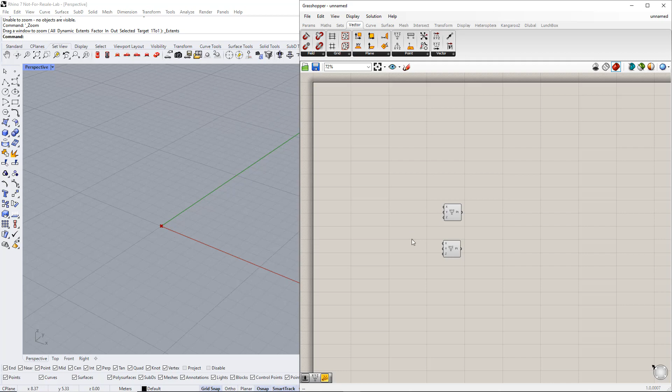For the second point, we set up a number slider to the x-coordinate, so that it can be easily adjusted later with the slider. We insert the number slider command from the Params tab and then double-click on it to change the lower and upper limits of this slider. We enter number 1 for the lower limit, and 30 for the upper limit.

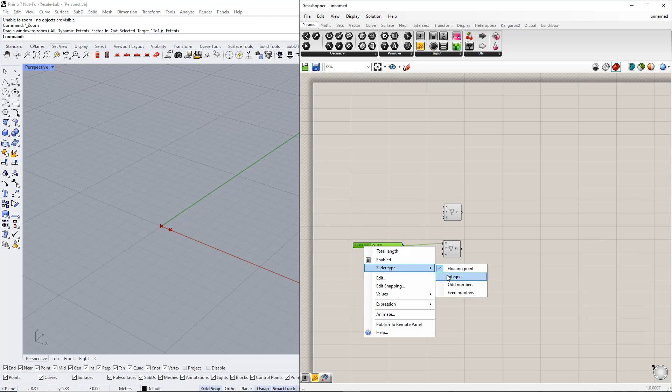We also enter a name for this slider, and for that we write total length. By right-clicking the slider, we can select the slider type, floating point, integers, etc. For example, we select integers.

After that, we create a line between these points using the line component. As you can see, when we click this line, it is colored green. Next, we determine the middle point of this line using the curve middle component, which is in the Curve tab.

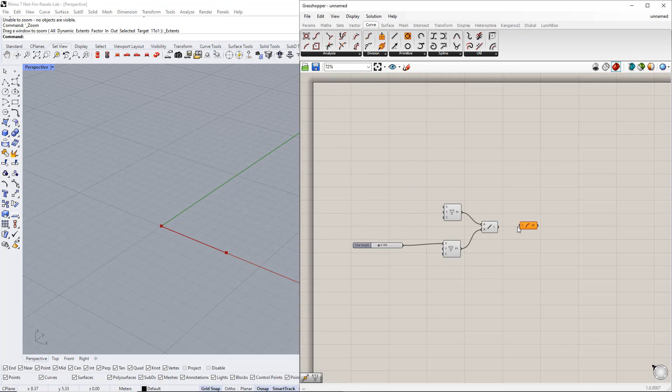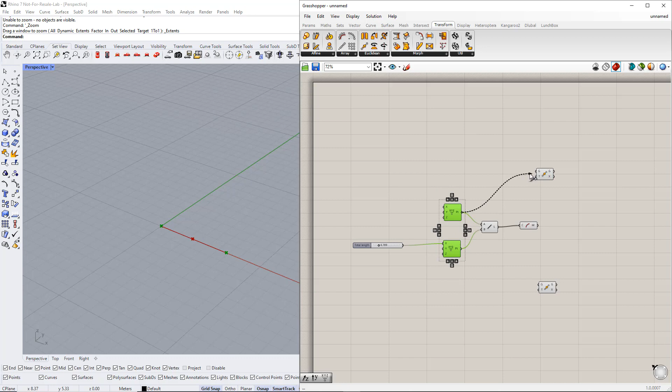In the next step, we copy these points using the Move component. You can find it in the Transform tab or double-click the canvas and write Move. Now we start to copy these points in the Z direction. First, we copy the base points. As you can see, by default this value is 10 and in the Z direction.

We need to insert the unit vector parallel to the Z-axis by using the Vector tab or by double-clicking the canvas, writing Z, and selecting this component.

We set up a range, for example, from 1 to 5. For this, we need to create a number slider. We can do this by double-clicking the canvas and writing 1, point, and 5. After that, we enter side height for this slider name.

For the third point, the middle point, we repeat the same procedure, but regarding the value in the Z direction, we insert the expression component. Double-click the expression component to open the expression editor and change the expression to x plus y, where x is the side height and y is the apex height.

For this, we set up a range between 0 and 5. After that, we enter apex height for the slider name. Then we create lines between these points using the line component.

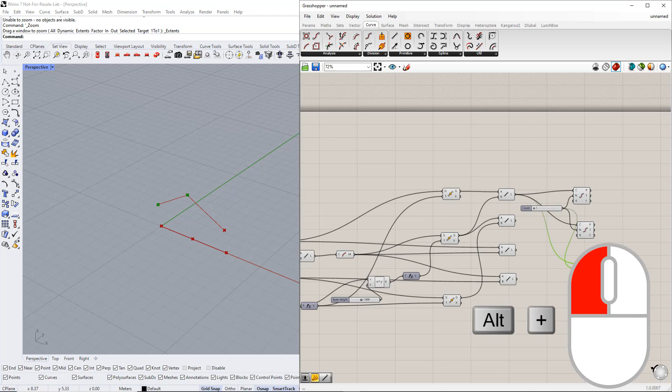Now we create the verticals as well as the diagonals. We begin with the verticals. First, we need to determine which points will be connected to each other. We connect the points of the first line from the lower chord to the points of the first line from the upper chord. We start with the first lines from the lower and upper chords, as you can see.

For the second lines from the lower and upper chords, we do not need to consider the first point, because it has already been considered. For this we utilize the Cull Index component. You can find it in the Sets tab or by double-clicking the canvas, writing cull, and selecting the component from the list. By using this component, we can choose a specific item to remove from the list.

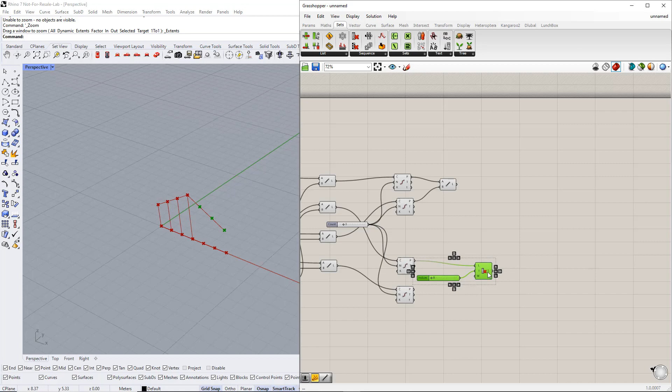Now we need to determine which item will be removed by using the number slider command. For this, we enter 0, 0, which refers to the first point of a list. We repeat this for the points from the lower chord. Afterwards, we connect these points to each other using the line component.

We group these lines by hitting Ctrl+G and writing verticals for the name. Next we create the diagonals.

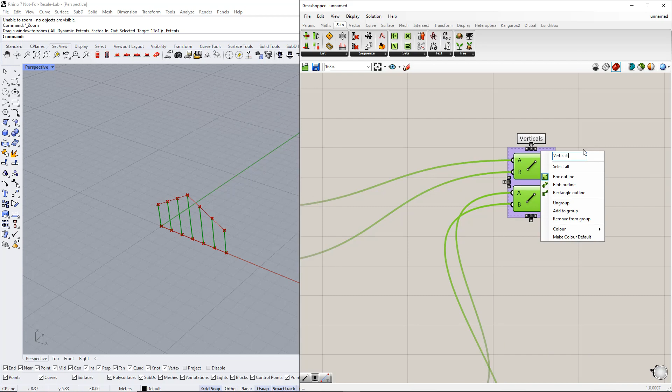As you can see, we connect these points in this pattern. Therefore, we do not need to consider the first point from the lower chord or the last point from the upper chord.

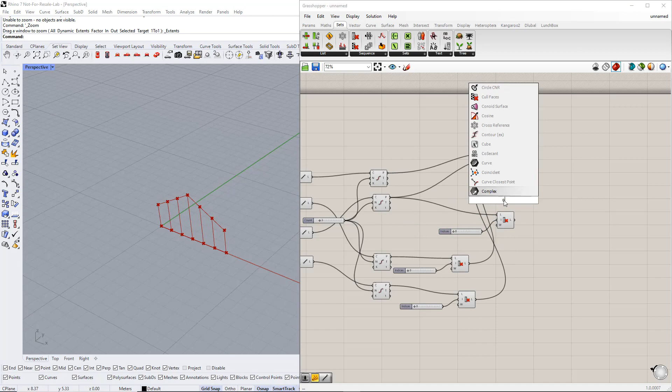We can cull them using the cull index component. For the first point, we have to enter 0 as index, since 0 refers to the first point of a list. For the last point, we have to enter -1 as index, since -1 refers to the last point of a list.

We can add the -1 to the range by double-clicking the slider and changing the lower limit to minus values. Now we create a line between these points using the line component.

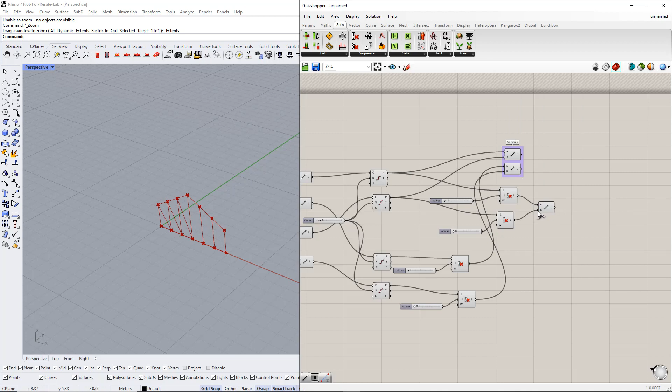We repeat the same procedure for the other side. Then we make groups and enter names for all the groups, as you can see.

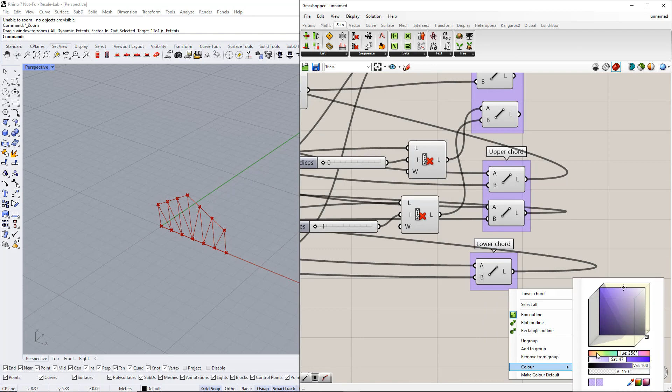Next, we put all the number slider commands together in a group to control all the parameters easily.

In the next part, we create members for these lines. We insert this component from the Dlubal tab. We also need to define the member type using the valueList command. For this example, we select the beam type.

After this, we connect the line components to the Grasshopper line in the member component.

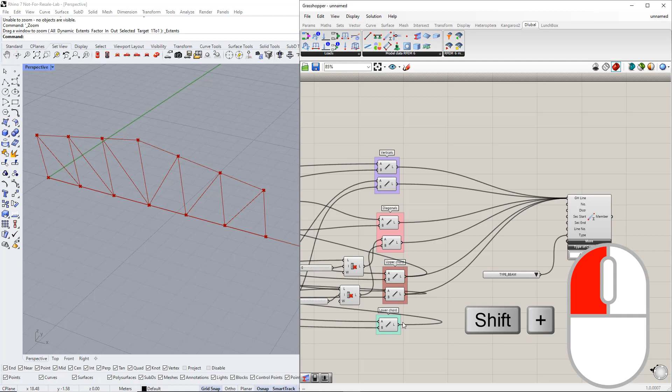In the next step, we define the cross-section as well as the material. For this, we insert the Dlubal components, section and material. Next, we insert the panel command to enter the properties of the section and the material.

Now we enter these properties. For the cross-section, we enter 1 as the section number, and R, M1 and 120/120 as the cross-section name.

For the material, we enter 1 as the material number, and C24 as the material name. Make sure that you use the correct RFEM terminology. Only then is it possible to export the elements correctly into RFEM.

Afterwards, we connect the material component to the material number in the section component, and connect the section component to the section start in the member component.

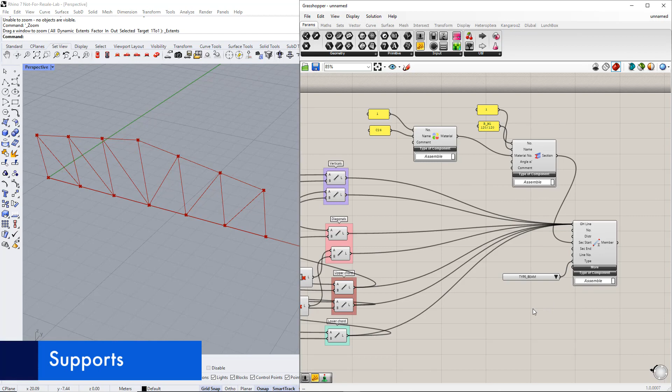Next, we define the supports. For this, we insert the nodal support component from the Dlubal tab.

For the first node, we would like to create a hinge support using the panel command. As we mentioned in the first example, 0 means free, INF means rigid, and a specific number in between means spring. Then we connect this panel to the respective support conditions.

We repeat the same procedure for the second node but with other conditions, because we want to define the sliding supports.

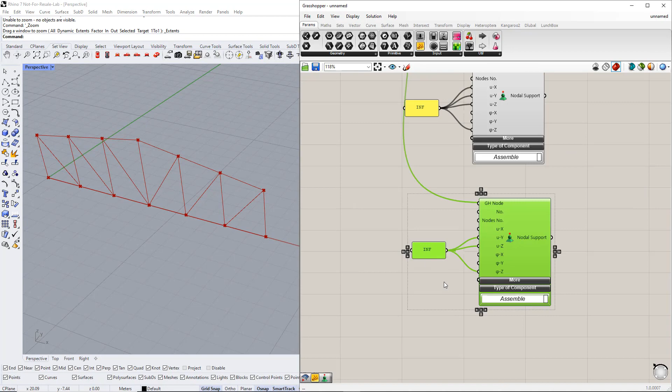To transfer this model data to RFEM, we need to insert the Dlubal component, RFEM6 export component.

To start the export, we utilize the button command from the Params tab for this example. As we did in the first example, we can select units using the value list command.

We can also overwrite the previous data in RFEM using the Boolean toggle command. This means all data in RFEM will be deleted before the export, once we switch to true.

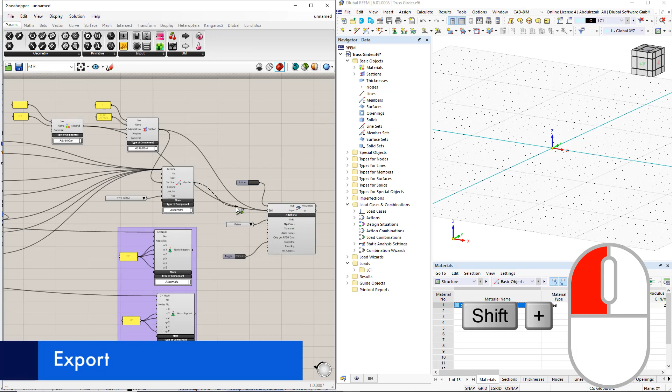After connecting all the components to the RFEM6 component, we double-click the button command to perform the export.

All changes to the parameters in Grasshopper now have a direct impact on the RFEM model.